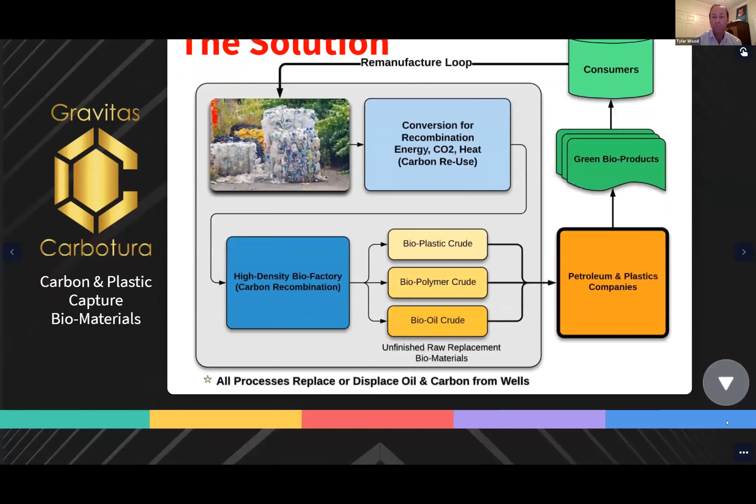It's an elegant system that allows us to basically bio-extract and air-mine crude supplies. For an oil business and the entire petroleum industry, they have exploration costs, drilling costs, and extraction costs. We come in at about half the cost, while at the same time eliminating plastic waste and continually sequestering and reusing that carbon.

We're going to get into the environmental attributes and our ESG metrics. I'll let Alan get into some of the operational metrics that are pretty exciting. Essentially, because we're all thought leaders in the sustainability space, we've got a pretty exciting presentation here, because each one of these little biocarbon wells...

...eliminates 45,000 tons of plastic waste annually. It captures 282 tons of carbon a day, and 13 million gallons of water is bioremediated per day—about 5 billion gallons a year—and about 1.2 million pounds of raw biomaterials that can be vectored out to all sorts of uses.

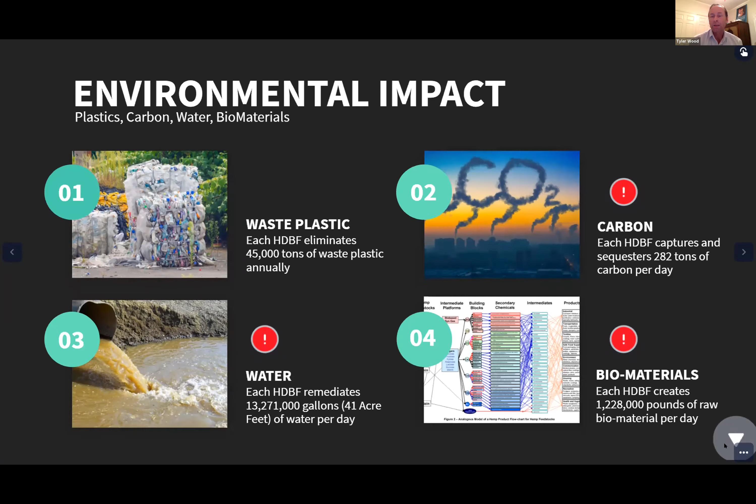In fact, about 150% greater usage than petroleum because of the fiber strength of the biomass. We're a zero waste and closed loop process, enabling guilt-free plastics and renewable energy.

Some great social components on the S of the ESG. Each facility creates about 100 construction jobs and 100 permanent jobs, really focusing on areas where we can hire minority and underprivileged employees with higher than living wage salaries, and creating a great culture, because honestly, it's more fun when you know that you're doing good for the world and have a purpose.

I think one of the problems initially in the sustainability space was it was seen as a compromise with profitability, but that's not the case—it doesn't have to be the case. We target greater than 80% gross margins on all the products.

Investors are obviously very well taken care of, but we also have a number of currencies because we're also working with tax credits, carbon credits, plastics capture credits. There's some really interesting credits out there, and these facilities can last 20, even 40 plus years with proper maintenance.

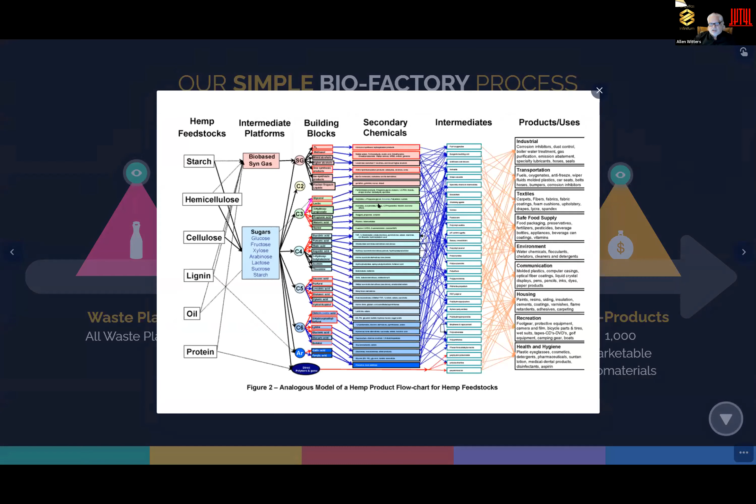We broke our business into 3 areas. Area 1 is waste plastics, energy, water handling. Area 2 is the high density biofactory. And area 3 is the processing and refining. All of these technologies are proven, but never been chained together in this manner.

You can see our attributes in the second line of data here. We're doing complete elimination of the waste plastics of all types, and then we recombine those using the plants into a multitude of biomaterials. At the same time, it's the most efficient carbon sequestration method available.

I just want to interrupt real quick - I'm going to give you another 10 minutes because we have another speaker that couldn't make it, so there's no rush right now. Thank you. Okay, thank you.

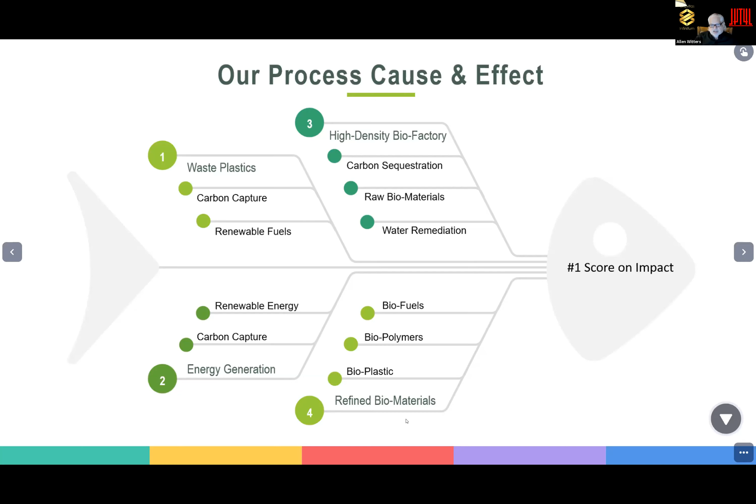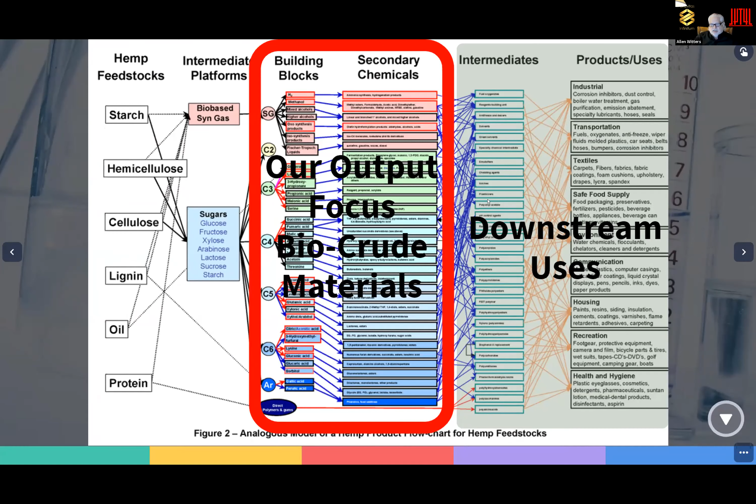This is our cause and effect diagram, pretty simple. I went through the biomaterials a little bit, but here our core competency is these biocrude materials. There's thousands and thousands of downstream uses. Our primary material buckets are biofiber for plastics, paper, fillers, bio-oils, and biofuels.

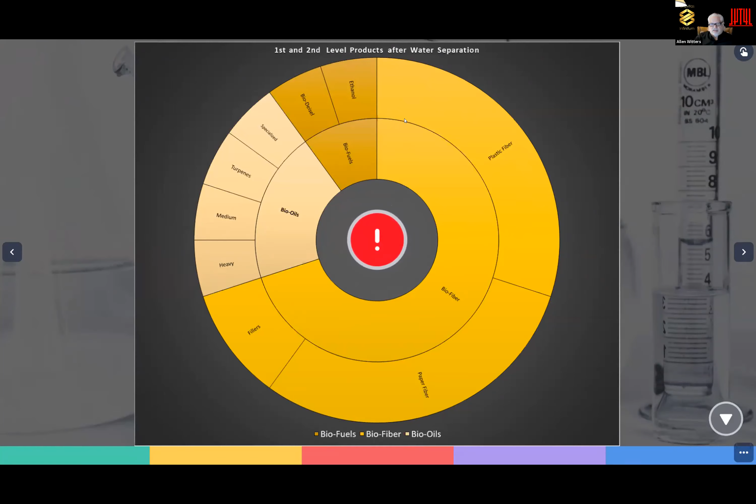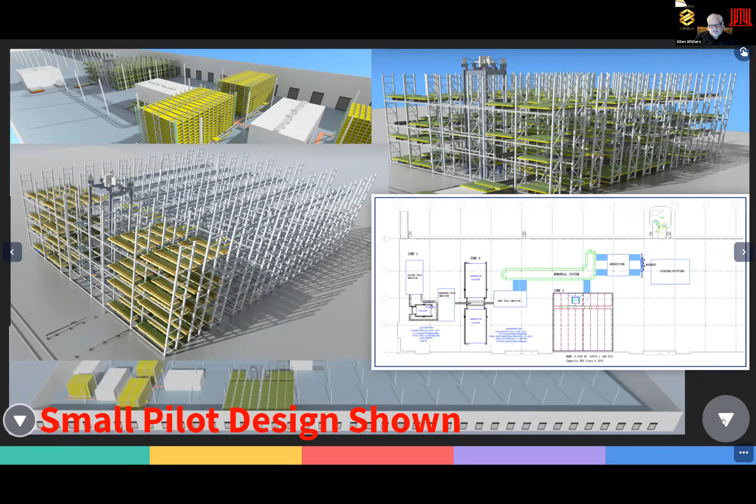So what does a plant look like? This is a small pilot design, fits in 40,000 square feet, and it puts out about 1.5 million pounds of materials a month. We basically merged Amazon logistics with hydroponics. On the front end, we merged microwave pyrolysis to eliminate the plastic waste.

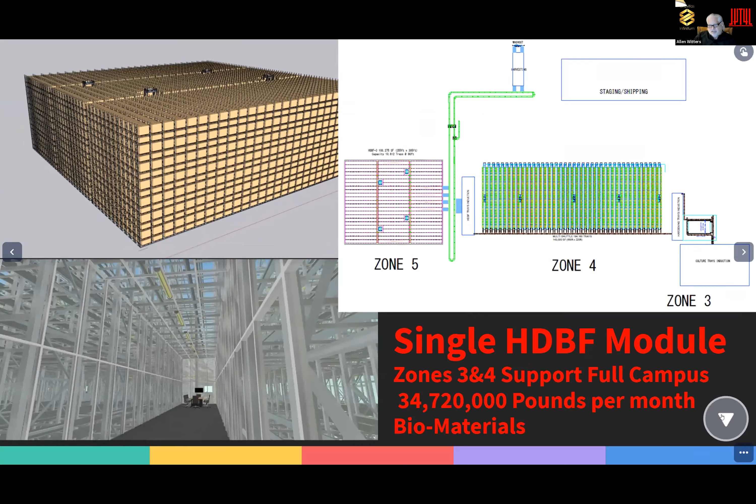This is what one of our modules looks like. It's about $100 million invest, and it puts out 34 million pounds of biomaterials. We put 6 of them together in a campus, and we've got a $600 million facility that replaces probably 30 oil wells.

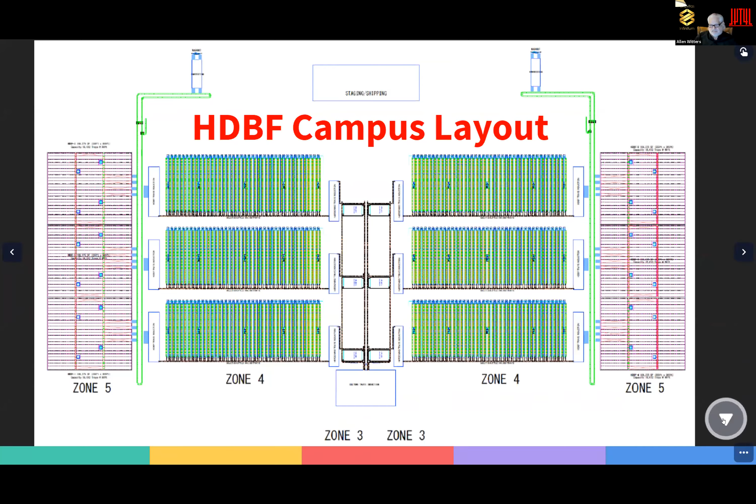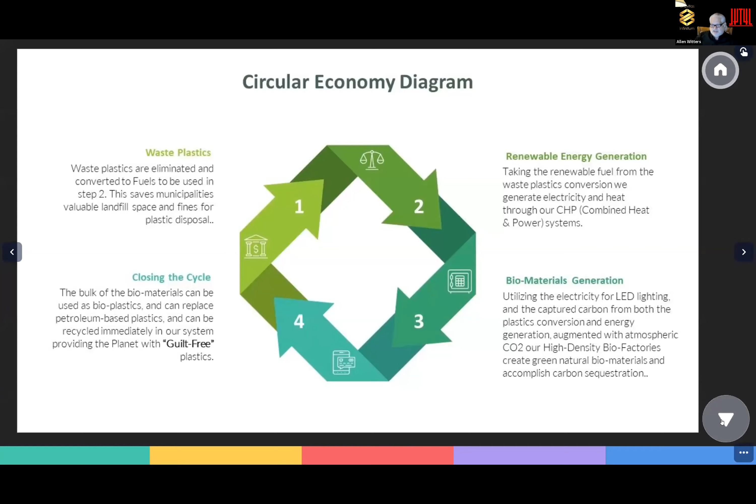Today we're a very interesting model. We have 6 carbon credits and renewable energy credits right out of the gate, compared to basic bespoke products that are planting trees as one-time shots. To give you an idea, one tree takes 100 years to sequester 1 ton of carbon. One of our plants is doing 282 tons a day. We're continually producing credits, measured and verified every minute, and we expect to support a subscription model on credits.